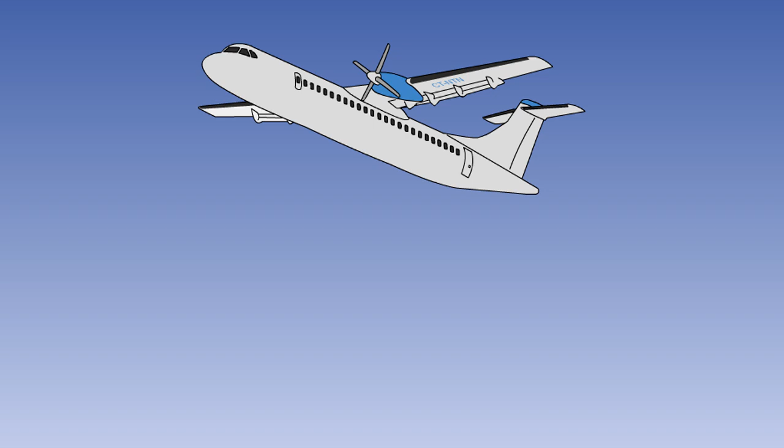In this lesson, we will discuss manual operation of the primary flight controls. The movement of the flying control surfaces, in response to the movement of the cockpit controls, may be achieved manually on smaller aircraft. In a manual system, the control surfaces are connected directly to the cockpit controls by a system of cables, rods, levers and chains.

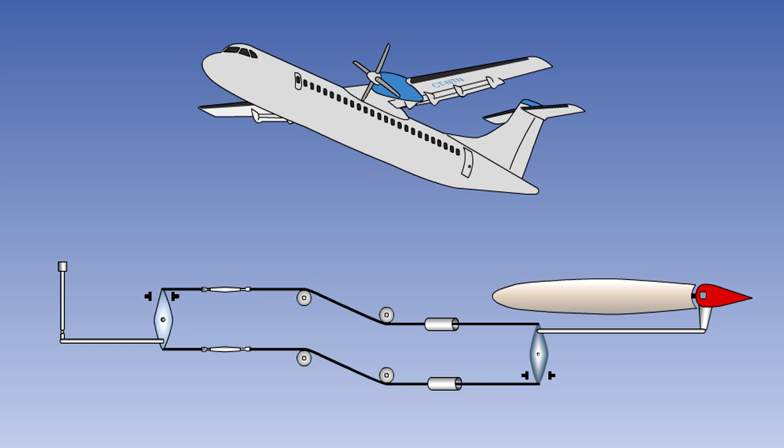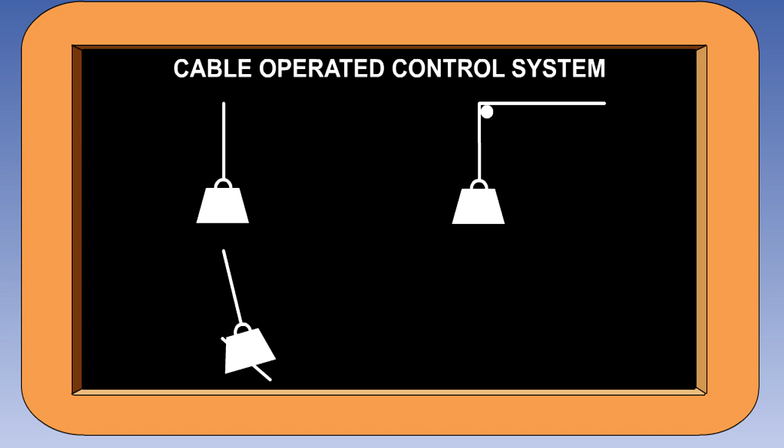Most manual control systems use flexible wire cables to transmit movement from the pilot's control to the control surface. Cables have advantages over push-pull rod type linkages: they have a very good strength-to-weight ratio, are easy to route through the aircraft, their direction can be easily changed using pulleys, their flexibility makes them resistant to impact damage, and they take up less room and have fewer joints than systems using solid rods.

In this graphic, we examine the manual control of the elevator on a light aircraft. The control of the rudder and ailerons is achieved in a similar manner using similar components. As cables can only operate in tension, the control surface is connected to the input control by two cables.

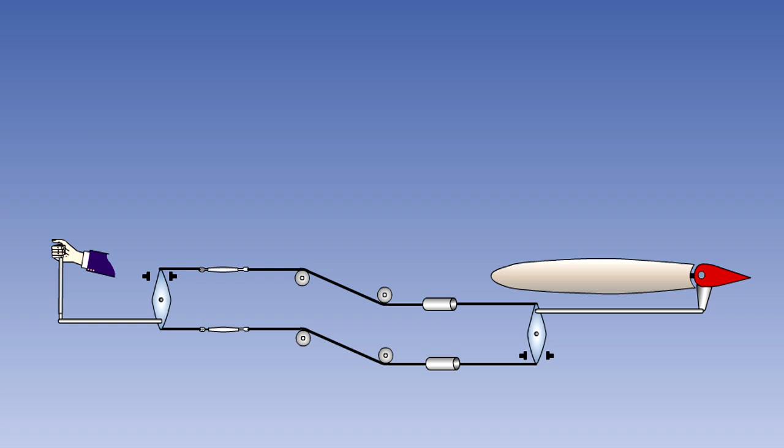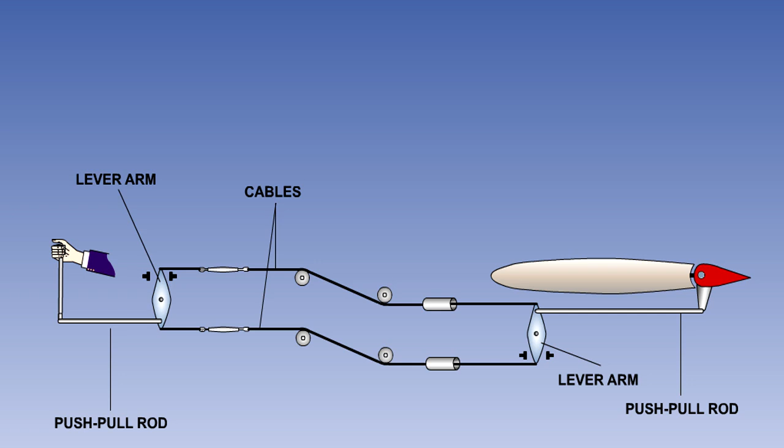The system is very simple in its operation. The pilot operates his control. It is connected by a push-pull rod to a lever arm which drives the cables. They in turn rotate another lever arm at the flight control end of the system. This moves another push-pull rod which operates the flight control. Pulley wheels are used where direction changes are required.

In order to move the control, the pilot has to overcome the aerodynamic load or stick force. If he releases the control, this force will drive the control surface and the control back to neutral. Manual flight controls are therefore known as reversible controls. You will see in another lesson that powered flying controls are irreversible or non-reversible.

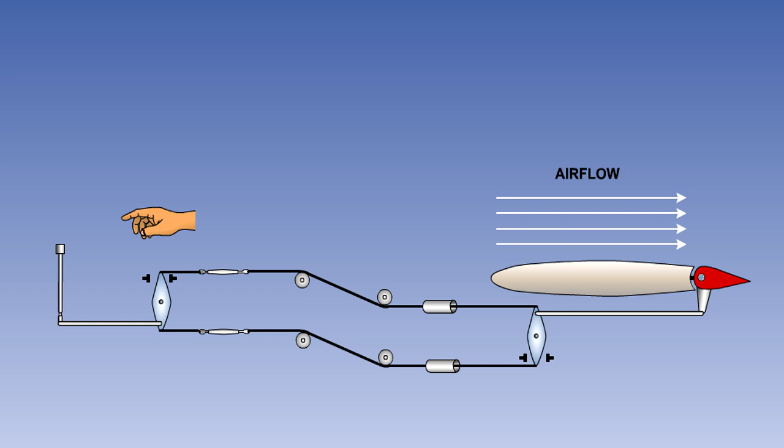The amount of movement of the control surface to either side of its neutral position is laid down, so that the required control can be achieved over the full range of operating conditions. The movement is not necessarily the same each side of neutral. For example, an elevator may have more control deflection upwards than downwards.

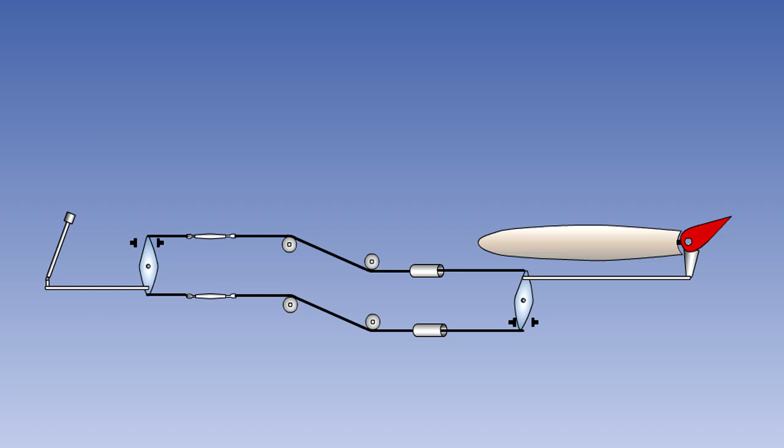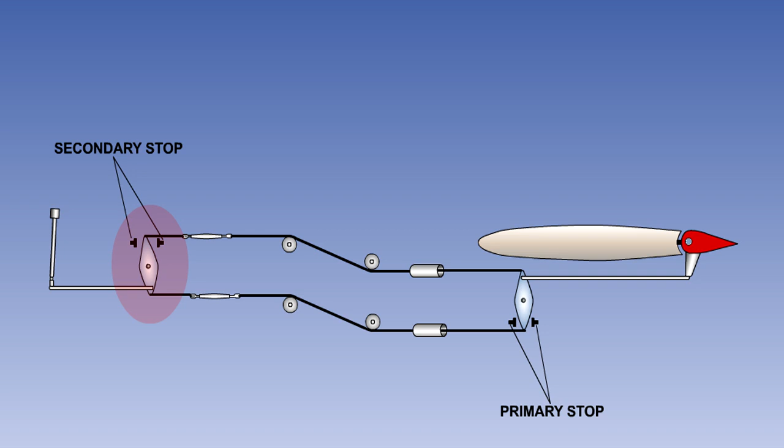The limit of movement of the control surface is determined by a mechanical stop. The function of mechanical stops is to prevent excessive control surface deflection, which may cause the aircraft structure to be overstressed during normal operations. The stop which limits the movement of the control surface is called a primary stop. A stop which limits the movement of the control column or rudder pedals is known as a secondary stop.

When the control surface reaches the primary stop, there will be a small clearance at the secondary stop. If the pilot should apply excessive force to the controls, the secondary stops will prevent him from damaging the control linkages.

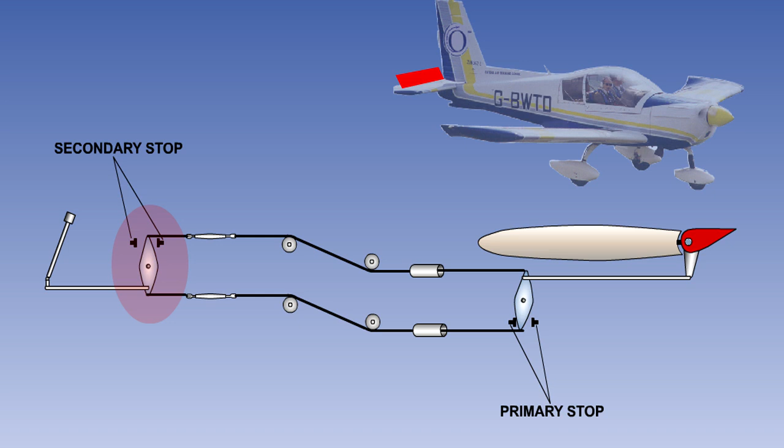A fair lead is a guide, manufactured from a soft metal or plastic, used where the control cable passes through the airframe structure, so that if the cable were to flex laterally, it would come into contact with the fair lead rather than the airframe structure.

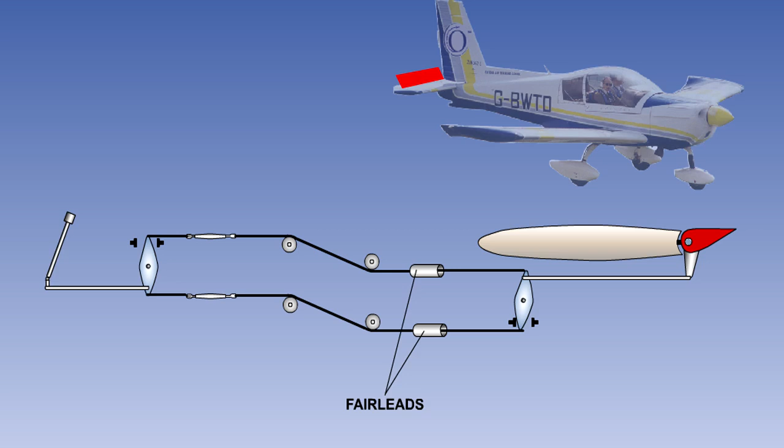It is important to have the correct tension in the control cables. If the tension is too low, the cables will be loose, permitting excessive cable movement, and if the tension is too high, the controls will be too stiff to move. Cable tension is adjusted by means of turnbuckles.

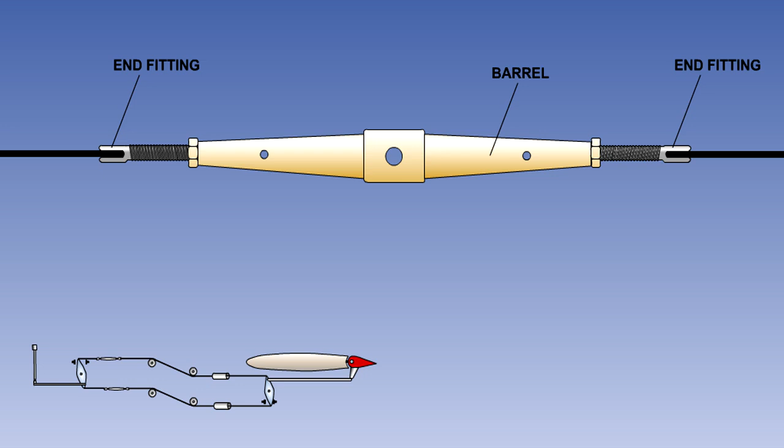Here we show a typical turnbuckle. It consists of a central barrel and two end fittings screwed into the barrel, one with a right-hand thread and the other with a left-hand thread. The cable is attached to the end fittings. The cable tension is adjusted by rotating the central barrel, causing the end fittings to screw either into or out of it.

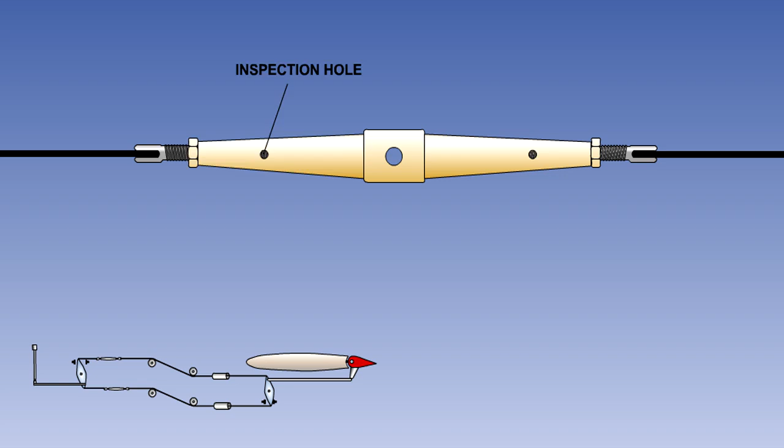Sufficient screw thread must be engaged between the end fittings and the central barrel of the turnbuckle to take the load which will be placed on the cable. To enable this to be checked, inspection holes are provided in the turnbuckle. To be in safety, the inspection holes must be completely blocked by the threads of the end fittings. This is verified by attempting to pass a hardened pin through the inspection hole.

Once the correct tension is set, the turnbuckle is locked using locking wire or some other suitable device to prevent it vibrating loose.

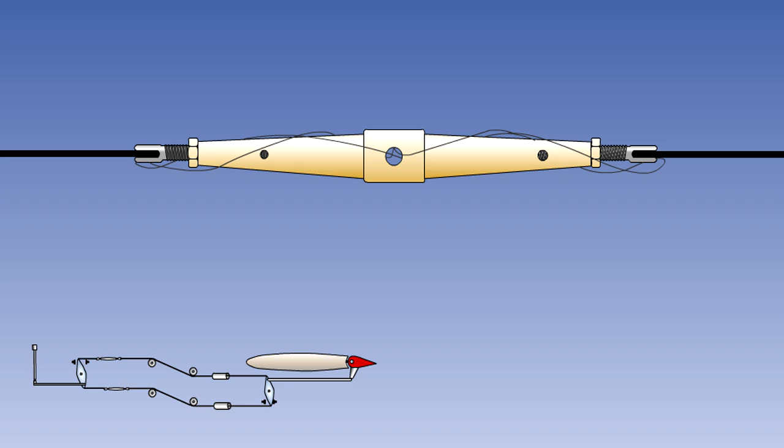Changes of temperature will change the length of the cables, and also the dimensions of the airframe structure, but as they are made of different materials, the rate of expansion will be different. This will cause a change in cable tension. On some aircraft, a temperature compensator is fitted in the control system, which automatically maintains the correct tension if the temperature changes.

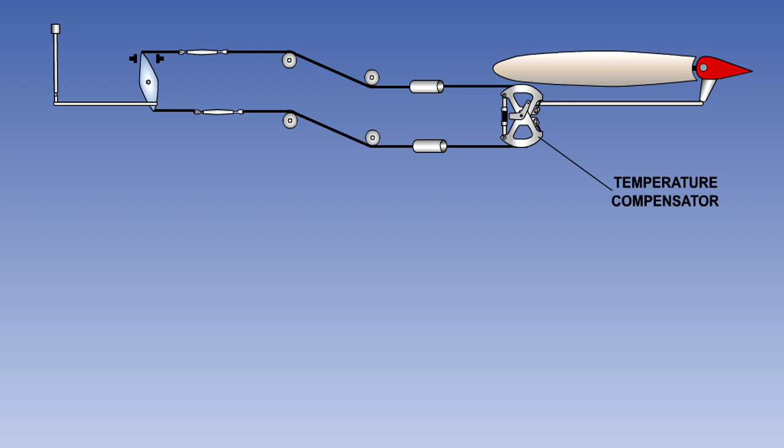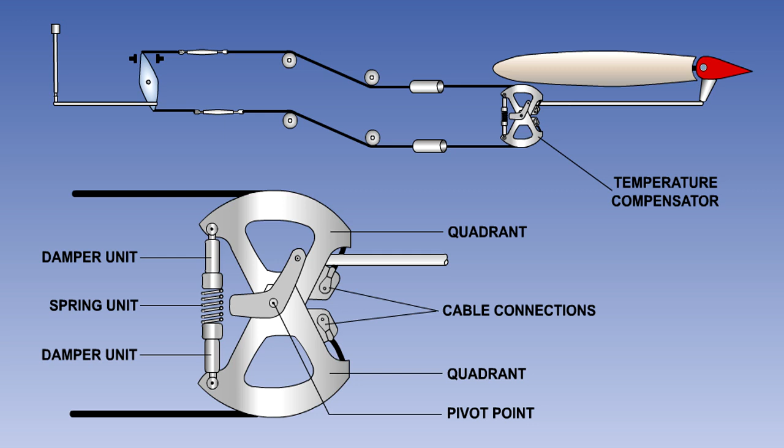In the temperature compensator shown in this graphic, the cables from the pilot's control are fastened to two quadrants. The quadrants are free to rotate independently about the central pivot point. However, they are connected together by a strong spring in the spring unit. Movement of the pilot's control operates the cables, which rotate the quadrants equally, moving the push-pull rod and the control surface.

If there is an increase in cable tension due to temperature change, the cable tension will overcome the spring and rotate both quadrants, reducing the tension back to the correct level. Similarly, if the tension reduces below the correct level, the springs will push the quadrants in the opposite direction, again correcting the tension.

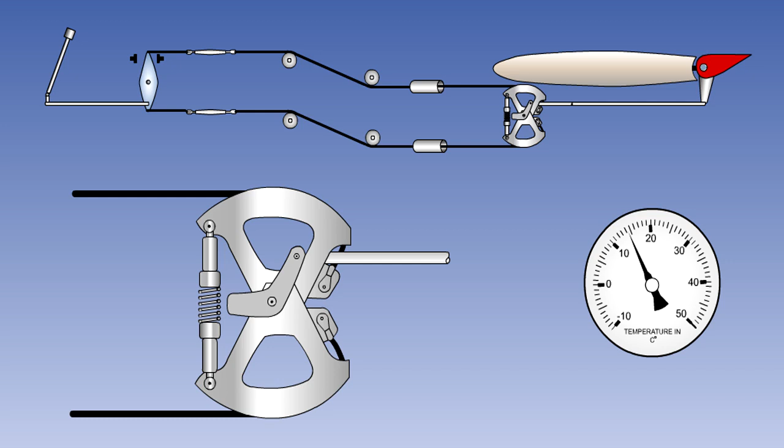Control systems should be free of backlash. Backlash is free or ineffective movement of the cockpit control when the direction of movement is reversed. It may indicate worn or incorrectly adjusted components in the control system. Excessive backlash can exacerbate the problem of control surface flutter.

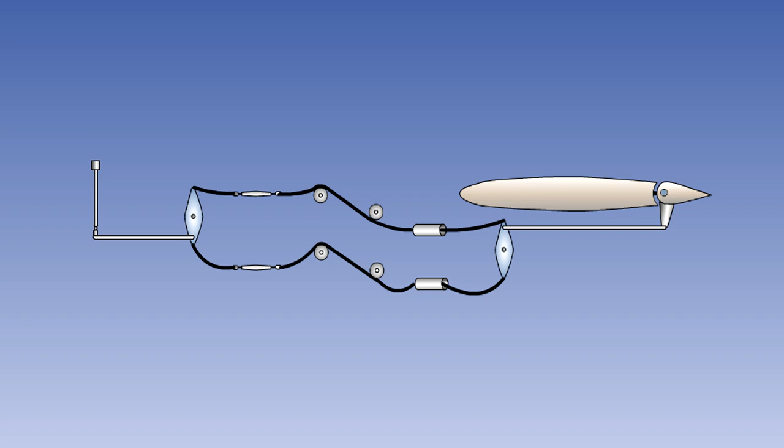As you can see in the extreme example shown here, the column has to be moved a considerable distance before there is any reaction from the flight control surface.

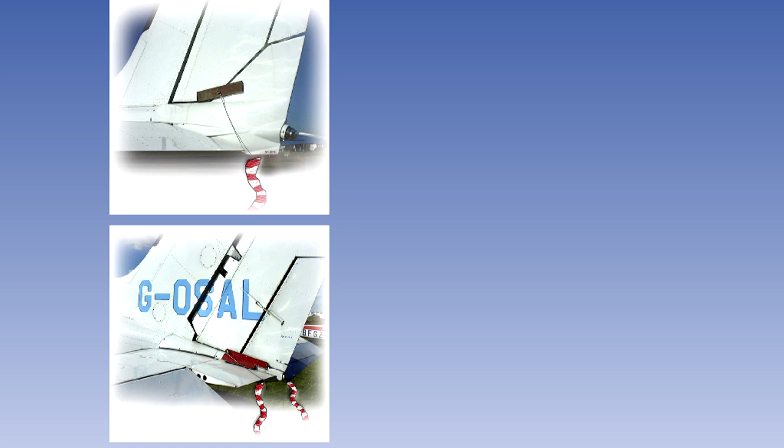When an aircraft is parked in the open, strong or gusty winds could blow the controls against their stops with sufficient force to cause mechanical damage. To prevent this occurring, control locks are fitted.

These may be external or internal, and may be fitted to the control surface or to the cockpit control. If they are fitted to the cockpit control, they may be arranged so that it is impossible to open the throttle until the control locks are removed. External locks have high visibility flags fitted. Obviously, all locks must be removed before flight.

That is the end of the lesson on manually operated flying controls. You now know the advantages that cable control has over other systems. You should understand the purpose and function of the mechanical stops, pulley wheels, and fair leads. You should also understand what is meant when we describe a manual system as being reversible. Finally, you should understand the purpose of turnbuckles and temperature compensators.